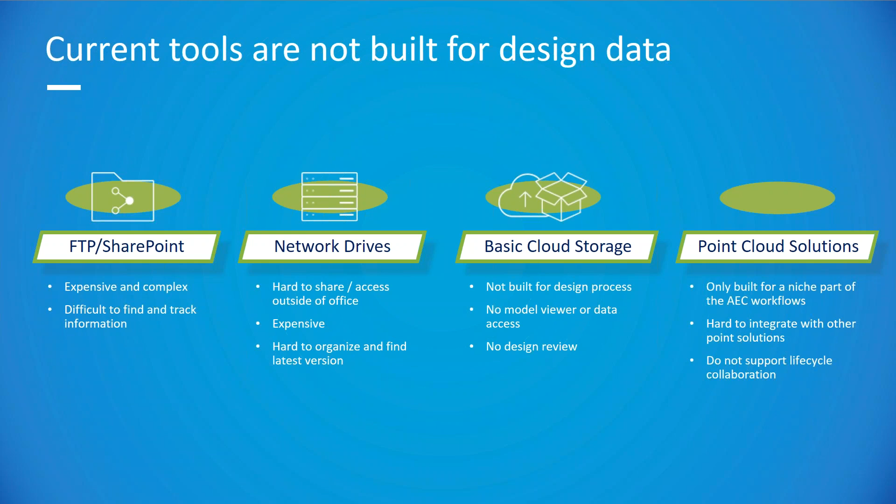Our current tools are not built for design data. The problem is that none of these tools fully solve the problem for designers because most of them were built for document-based collaboration. Common tools such as FTP, SharePoint sites, or even just a network drive can be expensive, complex, or they could be too simple and easy to manipulate and delete. Network drives serve the need for sharing internally, but as soon as files are to be accessed remotely by an external team member, these tools fall a bit short.

There are a couple of more points I wanted to make on that previous slide, but the gist of it is that the more your data is hidden inside some of these internal silos, the more difficult it is for you to share that information across multiple platforms and different people in different geos. So we're starting to see designers adopt some of these more modern tools, such as cloud storage, but it isn't quite the same as what the BIM tools are going to bring to the table.

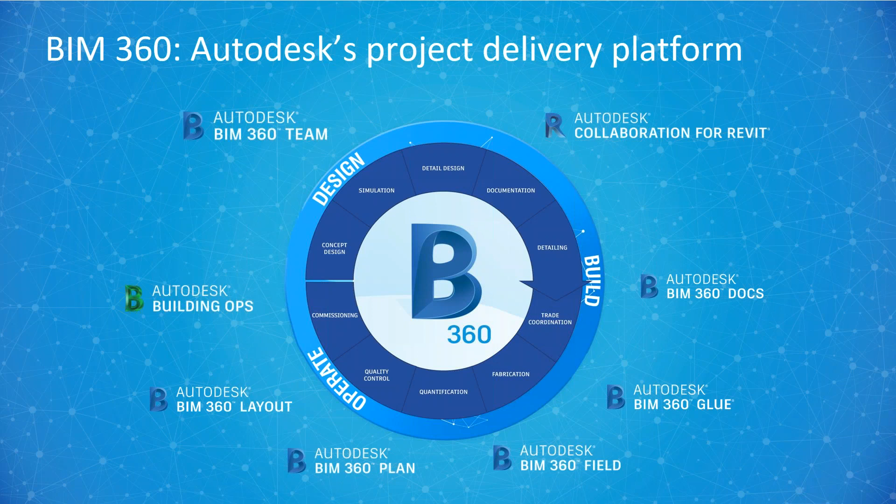And now we're going to talk a little bit about the BIM 360 side of it here, the Autodesk Project Delivery Platform. Autodesk is developing a project delivery platform to support activities during the design, build, and operate phases of the project. These tools are cloud connected and support today's way of working anytime, anywhere. From BIM 360 Team and Collaboration for Revit that support the design phases of a project, to BIM 360 Docs and Field and Glue and Plan, all the different products that support activities during construction, Autodesk has built a portfolio of tools that span the entire project lifecycle.

BIM 360 solutions for collaboration. Let's take a look at what the design collaboration built for the needs of designers and engineers and all project stakeholders looks like. And it's not just about the design files. We know that Autodesk makes DWGs and RVTs and Max and Navisworks file types, as well as DXFs. But the BIM 360 platform accepts many more different file types, such as your Office files, like Excels and PowerPoints and Words, and PDFs. It also does images like JPEGs and movies.

So if you've got video clips from drones, or you've got pictures or laser scan information that you can export to TIFF, all of that can be uploaded into your BIM 360 tool sets, including IFCs and SKPs from other formats. And in all, you're looking at over 65 design file formats and over 100 types of files altogether.

That's impressive. So Autodesk BIM 360 Team and AutoCAD Plant 3D come together, and they allow you to do this multiple discipline interface, such as engineers, whether they're in process or structural or civil, the project manager himself, pipe designers, mechanical designers, electrical designers can all work together in the same project environment. And at the same time, the stakeholders, such as estimators and the managers and the project owners and other consultants, can all take a look at that data in real time in the cloud.

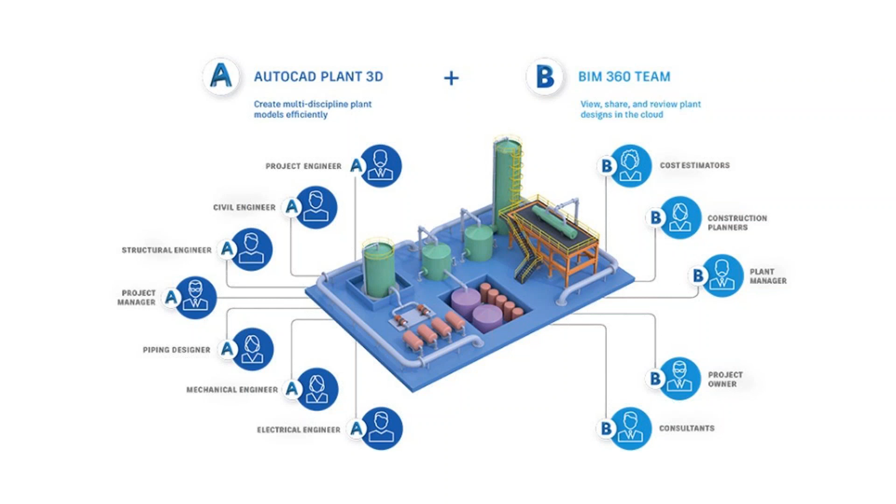And don't forget, all of this is accessible not only with your desktop, but with your mobile devices such as tablets and phones as well. That's where we're getting such a large amount of collaboration capability from remote users. Even construction coordinators can walk through the site and look at models on these mobile devices as they're walking through. So there's a lot of technology coming together here.

The collaboration with Plant 3D and BIM 360 Team, these points here are easy project creation. So we're going to look at how to create projects in the BIM 360 Team side, how to collaborate those existing plant projects with those BIM projects and vice versa, and how we add team members, and then give those people roles such as editors or just viewers.

So let's take a look. We've got 3 short presentations that we're going to look at here real quick. The first is how to create the project in the BIM Team site. The second is the project creation on the Plant 3D side. And the third is the collaboration itself. So we'll take a look at those here in a second.

First, we'll go to the BIM 360 Team site, and we'll log in with our credentials. Once we've logged in, we'll hit the Create Project button. We'll give it a project name, and as you can see here, you can pick an avatar or you can upload your own images for that avatar that describe your project. We'll hit the Create Project button.

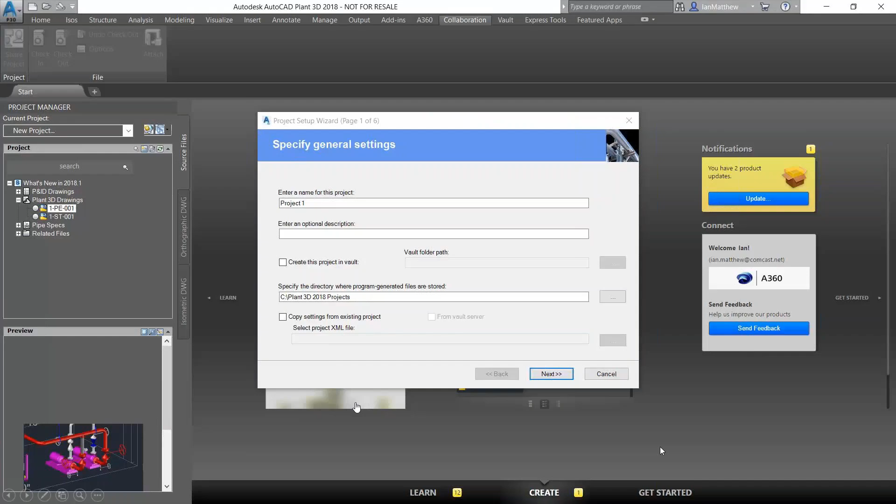And from there, now we'll take a look at the Plant 2018 project creation wizard. So we'll create a new project in Plant 3D. We'll give it a specific name. And from here, we can define the location as well as if there's any settings from a previous project we want to include. We'll select the defaults through these, and then we can also look at what our SQL database application will look like. In this case, we'll just pick the light version. And then we'll hit finish.

And then from there, once the project is set up, we can add different drawings to our project. Simply right-click on the P&ID section and browse to your P&ID to add. And you'll repeat that process for Plant 3D. So you'll add all of the different project models that you may want to reuse for this project. If you didn't have any, that's fine. You can create new ones. We're just showing you how to do it through an existing set of drawings.

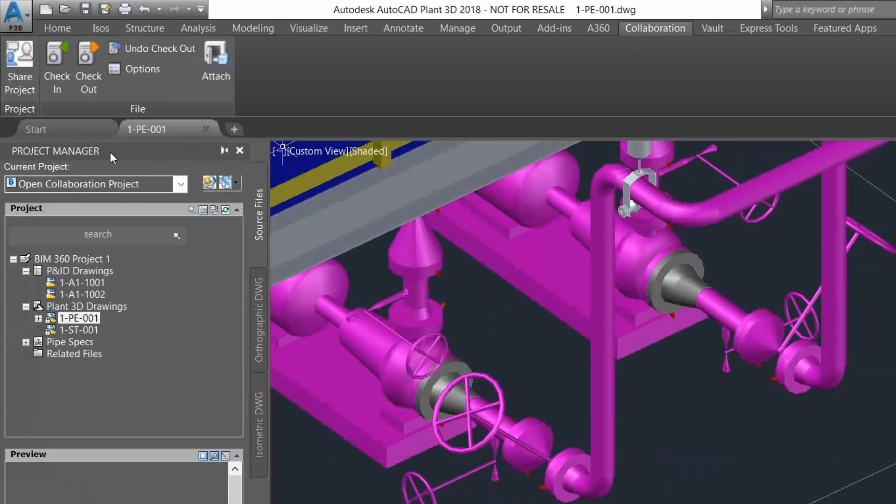So then we'll open up a drawing. We'll go to the collaboration section of the ribbon and hit the Share Project button. Once this is done, it'll pop up a dialog box and you can hit Get Started. It'll find your hubs that you've been either invited to or that you've created. You'll select the project folder that you want it to browse through and hit Upload.

So now it's taking this project from your Plant 3D local and it's sharing it up to the team site. And if you look at the flash underneath the progress bar, you'll see that it's loading all of the XMLs and configuration files as well as your pipe specs. Everything is going to the cloud. And it does take just a few seconds here.

And now when that's done, you can invite your team to access your new project in the cloud. It'll bring you back to the BIM 360 site. You'll go to your hub and you'll start inviting your users to participate in your project. You'll select your project and hit the invite button.

And now lastly, we'll look at how you'll browse for open or existing other collaboration projects. You'll hit the Open Collaboration tool, and you'll browse for the other projects that have also been synced to the BIM 360 team site. So you don't have to just create projects, but you can browse through your project manager all of the different projects that are there.

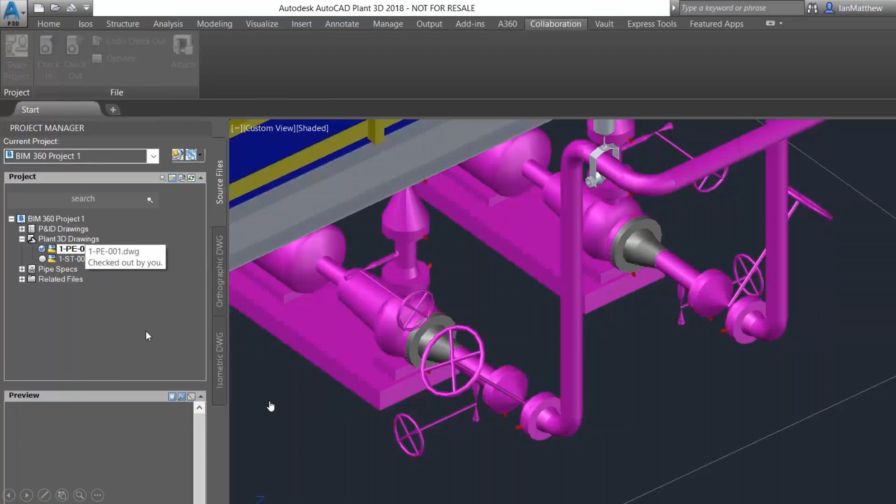And from here, we can check out a drawing now. It'll copy a local version of that drawing to your hard drive, so any changes can be synced back to the cloud. And other users who have access to the same project will also see that that drawing has been checked out and by whom. Let's see, close that. And now we can sort through the different pipe specs and create models and whatnot.

But the big picture here is that once we have this project in the cloud, we can have other users collaborate. What does that mean? That means that they can look at projects like we're going to do here. We're going to go back to the BIM side and we're going to look at this model. Oh, there it is. There's the models. And we'll open up that model in the BIM 360 viewer. And we'll go to that exact same spot that we were looking at in the model.

And we'll create a note here for other users or designers in this case to see. So we'll create a little markup here. This is the part of the collaboration side of it that really makes this thing so special and so unique. And we'll tell the designers that the next time they get into the models that we want to make this hand wheel a little bit shorter.

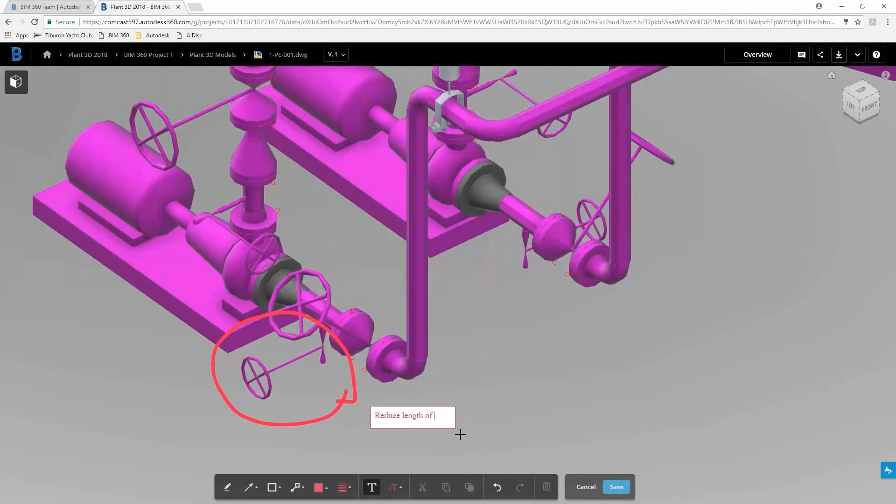And then we'll save. And now we can even assign that information to other users and tag them in it if we knew who was going to do it. And so now this information is stored in the project, and all users will be able to see that interface right here on the right for comments in the models.

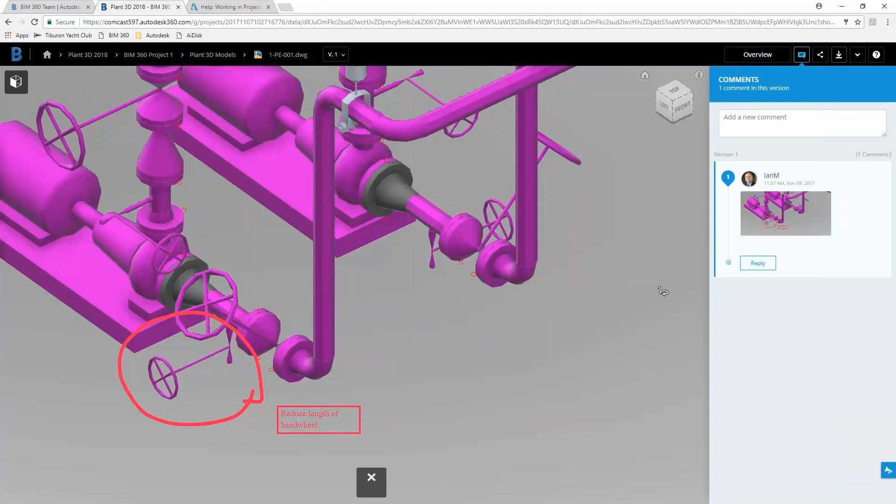So if you can imagine, during the course of a project, all of these different comments and iterations could be listed here in your BIM 360 team site. So other users or collaborators in the project can have an open dialogue about the current design state.

So what's new in the new 2018 Update 1 for Plant? Well, let's take a look. First off is the cloud-based improvements, right? So there's more project management tools, the ability to create instant backups and things like that. Our recycle bin in BIM 360. So if something is deleted in the BIM team side, we might be able to recover it if it was an accidental deletion. And then, of course, we can preview the images available without having to download the drawing itself.

In the isometric side of it, we've got improved support for offline instruments, and you'll see that here in a minute. The ability to select and deselect all the lines in a PCF export, so we can grab everything in there, or we can unselect all of those as well.

We can even now offset an elevation in the Z coordinate, when previously we could only do the X and the Y. And we can look at the status of our isometrics as they're being processed. There's a new interface for that as well.

On the spec editor side, we've got catalog builder import and export support. So the ability to export your catalog and your pipe specs into Excel is now just a few clicks of a button. And we've also got the ability to search in your project manager in Plant 3D, and various fixes. But for the most part, this sums up what you're going to see today.

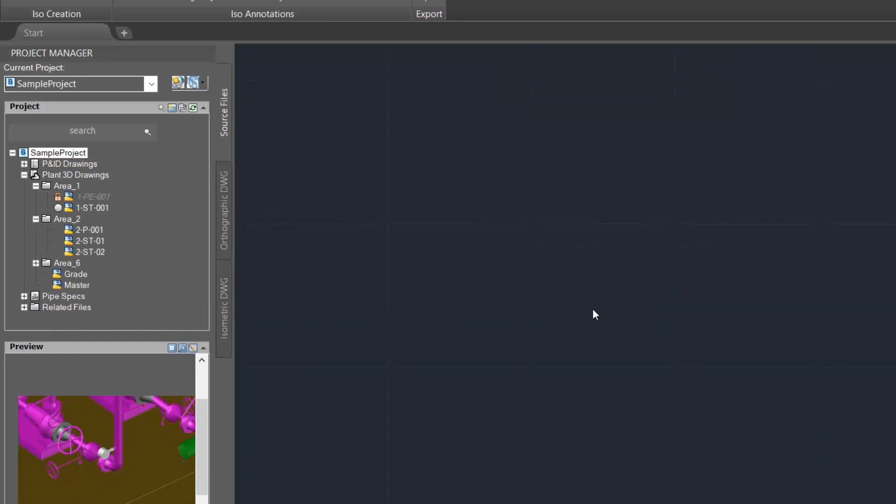So first, we'll take a look at the project setup. We'll go to project setup and try to open it. This is a BIM project and it's been checked out by someone else. So we can go into the setup, select undo checkout, and another administrator will be able to take back that checkout status. So if another employee is on vacation or sick, the system isn't down waiting for that person to return to work; other administrators can go in and forcibly undo the checkout.

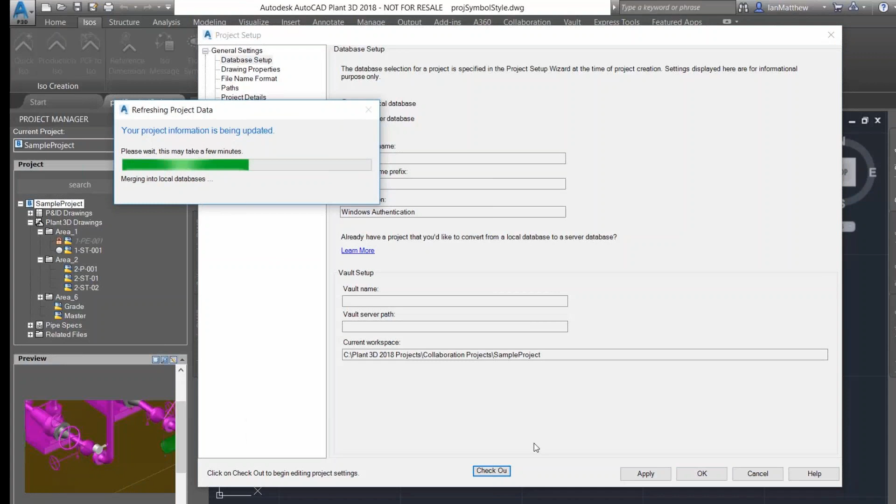And once that's all done, we'll hit the apply and OK button. This is really kind of a backup plan for more than one administrator to have access to be able to check in and check things out and make those force recoveries as needed. And we'll hit OK.

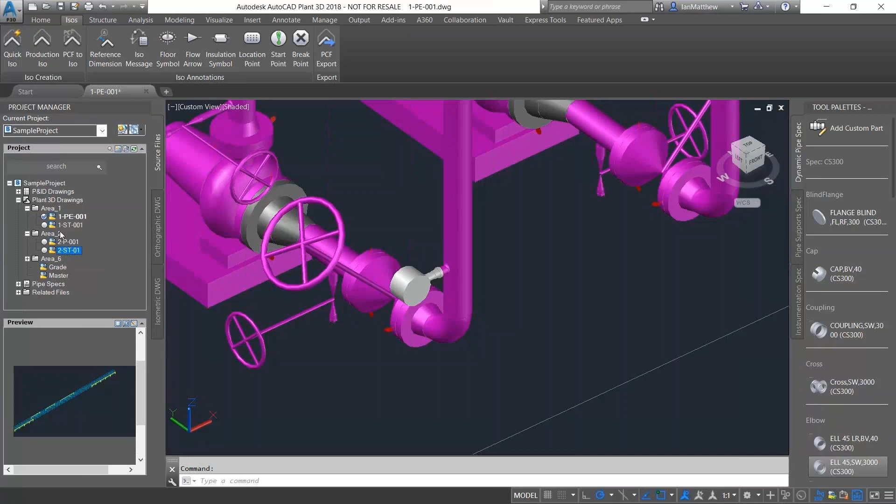And if you look here, this is how we can tell what's checked in and what's checked out based on drawing numbers. There's a little lockbox beside each drawing in the project manager showing what's checked in and what's checked out. An empty circle on the left side of the drawing means nothing's checked out, and your tooltip verifies that. So we can check in and check out items with BIM 360 Team, but we can also force them back to the status we need if users are out of the office.

And now we'll look at the isometrics improvements as well. The improved instrument symbology for isometrics, the progress indicator we mentioned earlier, as well as being able to select and unselect line numbers for PCF creation. Let's take a look at what that looks like.

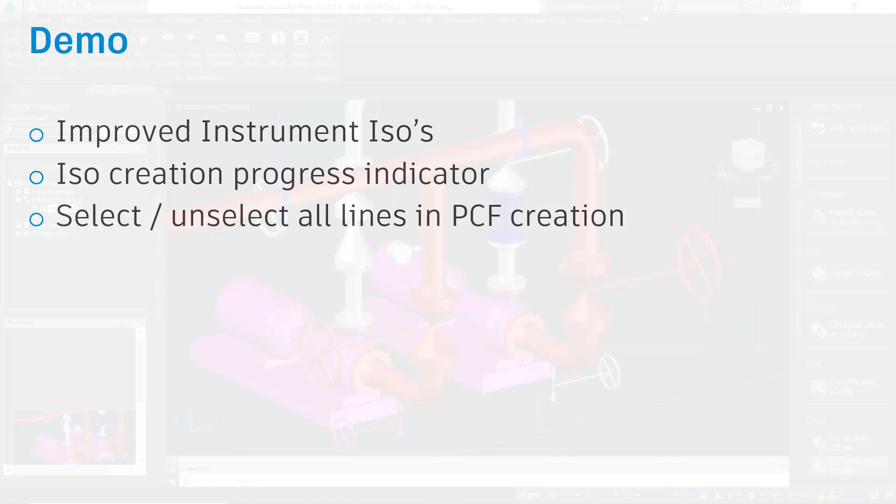So the first thing we'll do is go to production ISO, and we can filter our display lines, and also look at all the different ways we can select and unselect. But we can go straight to what we're looking for by typing it in and hit create. From there, we can look at the progress bar. That shows how many ISOs are being created, whether they're running successfully or not, and what stage of completion we're in. Now we can better track our progress as we create these.

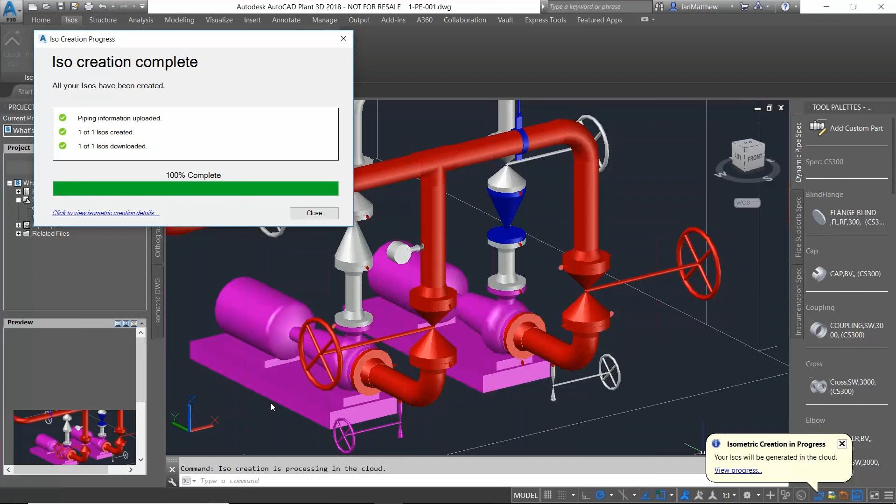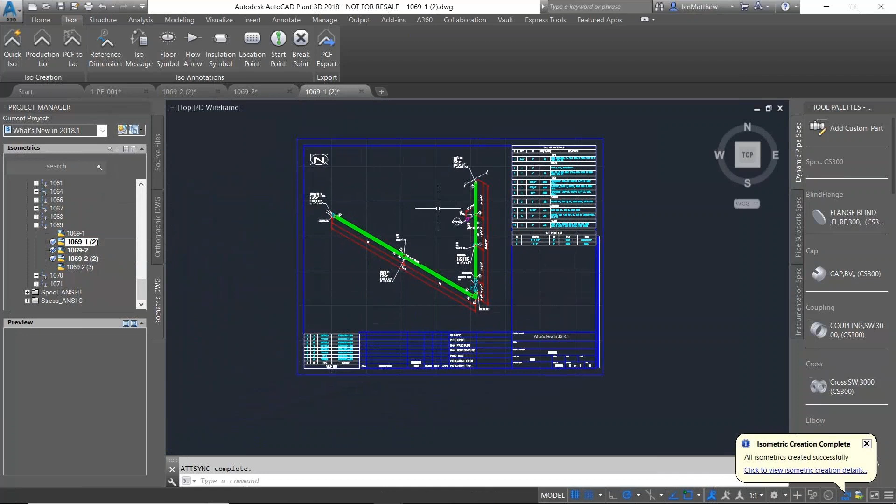Now that ISOs are completed, we can look at the isometric drawing tab in our project manager and scroll to 1069 toward the bottom here. Here we go. We can look at the different isometrics and check them out or check them in. Here's our isometric with our level gauge on it. And those are the out-of-the-box SKEYs that have been improved for that feature.

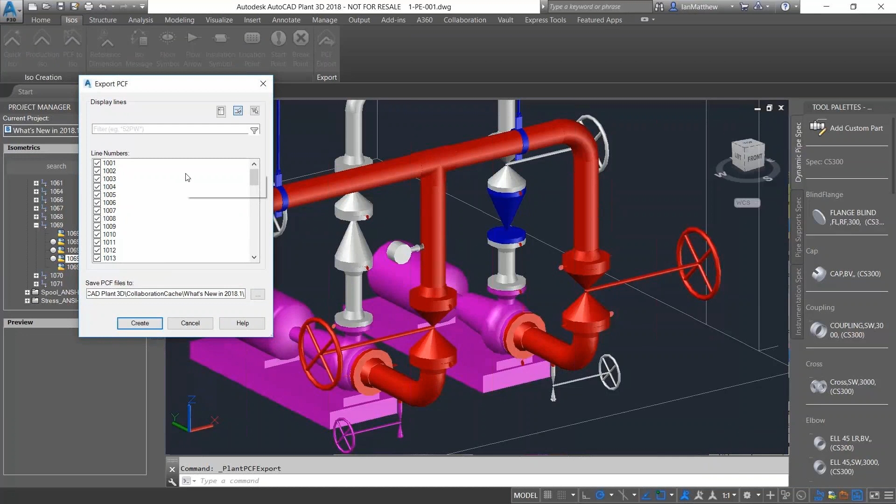Now we'll go to the PCF export, and you can select one at a time if you'd like, or right-click and select them all, or right-click and clear them all. That's up to you. And in this case, we'll also look at the offset we spoke about earlier, how we can now offset into the Z coordinate. And now that's an active field.

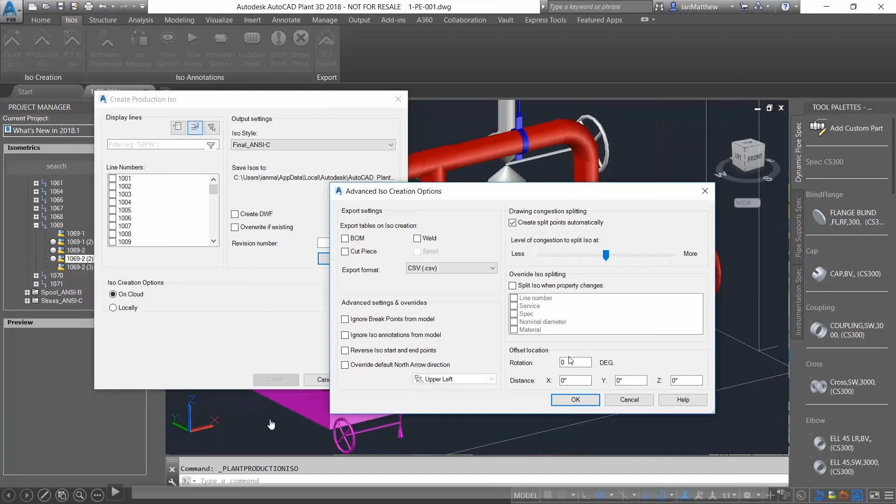Spec editor improvements, and we're getting close to the end here. Spec editor improvements are really about managing your pipe specs and catalogs, and now we can do that a little better through Excel exporting. So here we've got a pipe spec, and we'll select export data file, and from here we can select a full spec data export and browse to the location we want. In this case, we'll put it on the desktop.

And we'll give it a name, and the spec name up there, I think, is PN03. Yep. We'll select the workbook type we want to use. In this case, it's XLSX, and we'll type in the name of the pipe spec here.

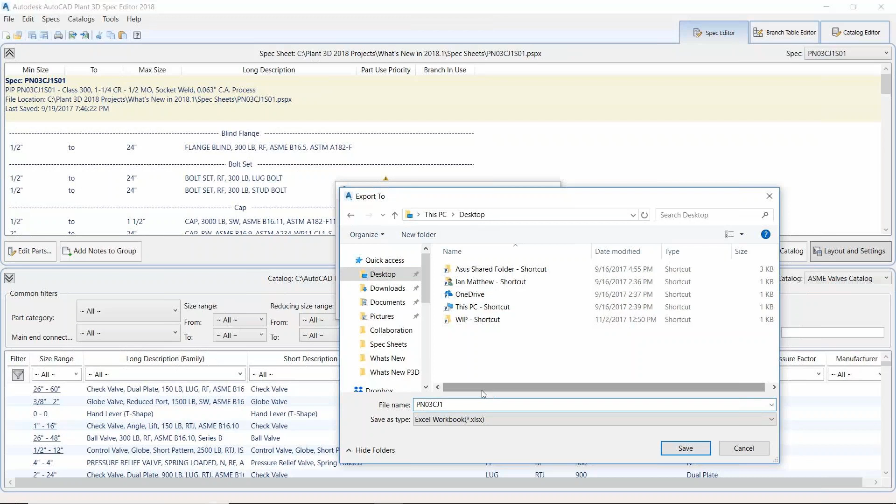I should have picked one that was a little bit easier to type. And we'll hit save and hit OK. And now all of these part families are being exported to Excel. If the spec is really large, this might take a little bit longer than normal, but in this case, it's just a simple spec, so it's relatively quick. And now all of that data will be inside that spreadsheet. And I'll show you that in a second here when it finishes up.

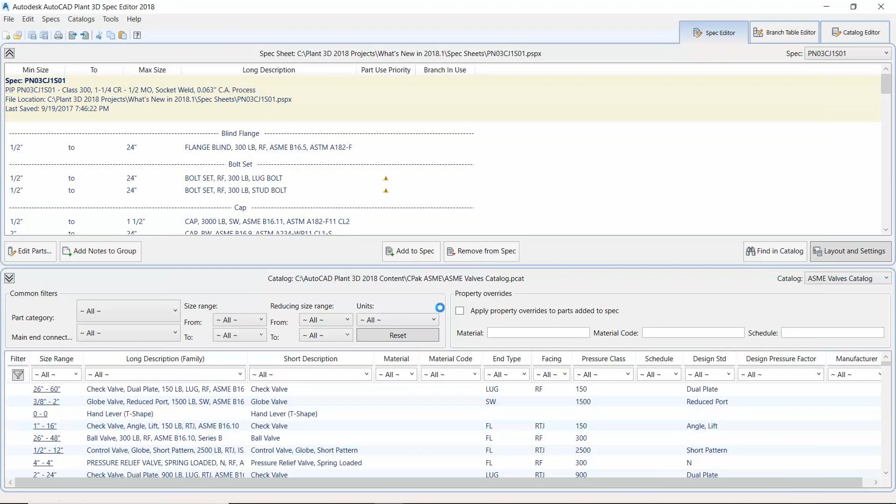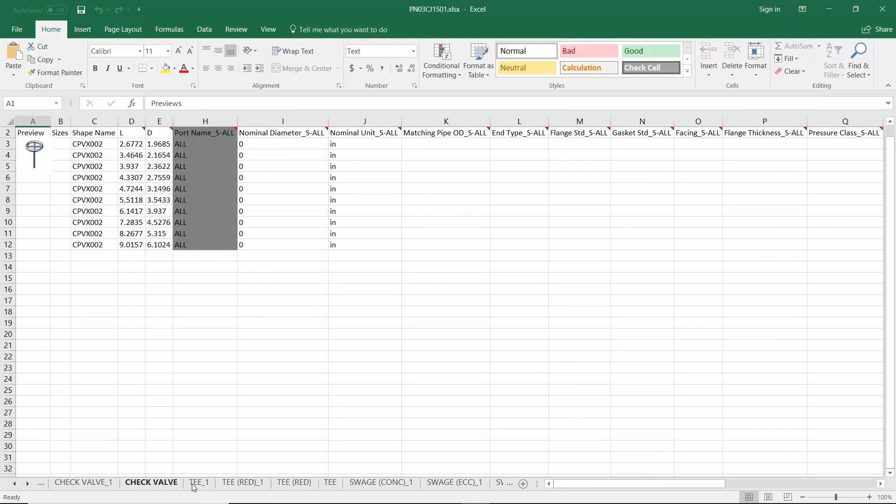It'll just take another second or two. There we go. And now if you look at the bottom here, you'll see that you've got your spec overview, but you've also got your branch table, all your hand wheels for all the different sizes that have been approved. And if we continue to scroll over at the bottom here, you'll see all the different hand wheels, but we've got some more information in here as well. There's all your valves, your check valves and tees and reducing tees and swages, all the different fittings, elbolets, sockolets, everything that's part of that piping spec is now part of this spreadsheet.

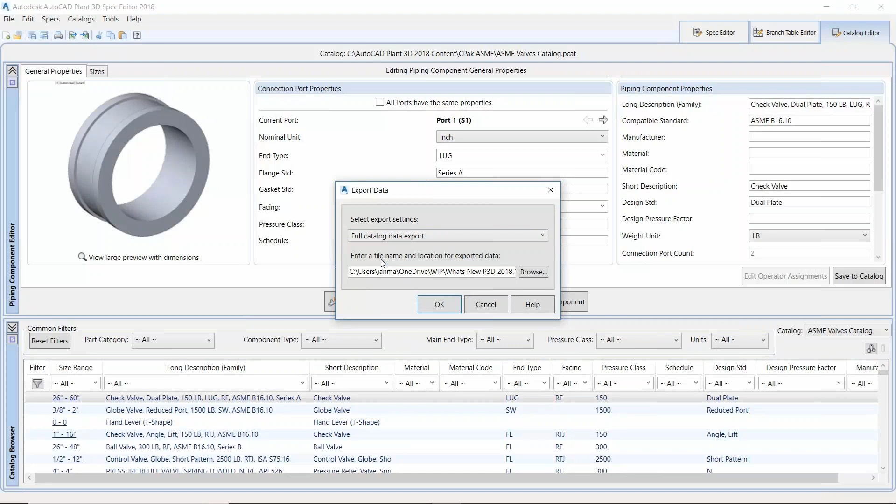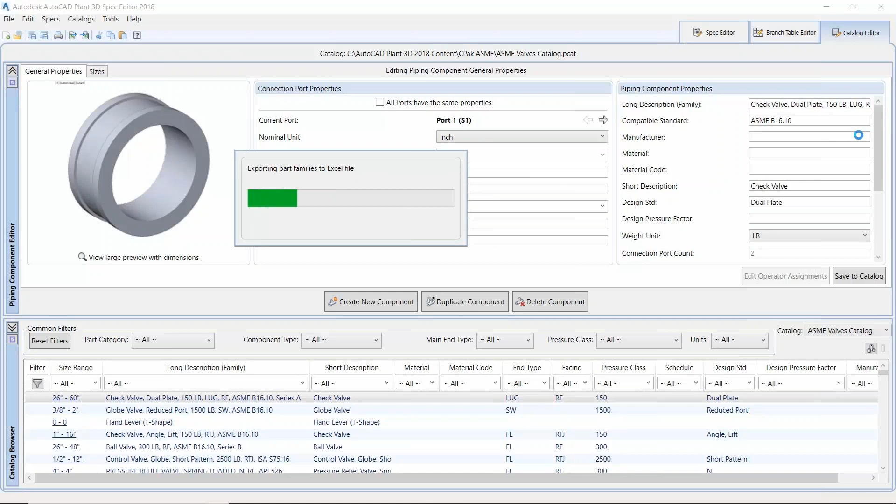And the same thing works for catalogs as well. So if we're going to export catalogs, we can do the same process, a full catalog export into an Excel spreadsheet. Kind of the same process here. In this case, we'll do the valve catalogs. And the same process. This allows you to make tweaks and edits into your catalogs and specs. As you can see toward the bottom there, we'll have another variety of the different catalog categories at the bottom.

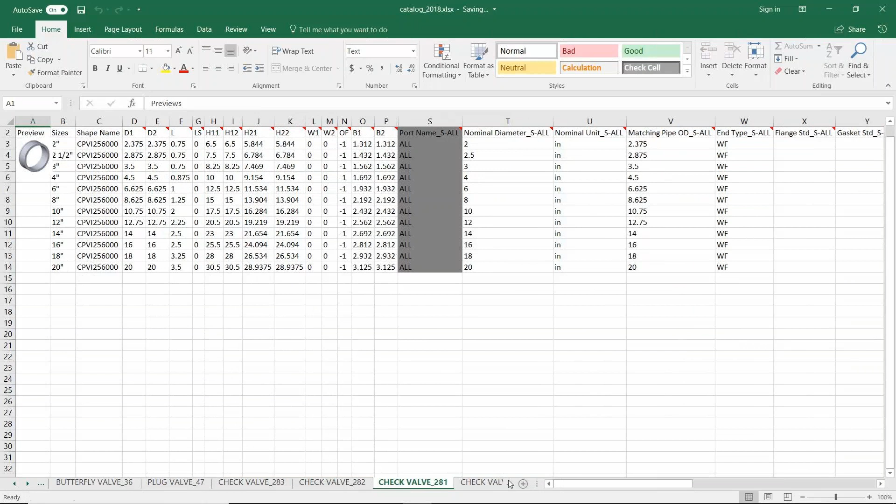And so now, Eric, I'll open the floor for questions, and I think Ian is in attendance as well. So I would appreciate any questions you guys may have. Yeah, Ian, would you mind telling us about some of the questions that you got on the questions panel and what your thoughts are about them?

Sure. So Daryl Dixon asked a question about when you force undo checkout a drawing, do you lose work done by the user that had it checked out originally? And the answer is yes, probably. Just like any other management system, it's going to revert to a previous version to be able to check out. So that is the consequence of having a drawing checked out and not properly checked back in. Yeah, how bad do you want to bring it back in is the question, right? Well, if you can't get at it, I would say that you need to bring it back in.